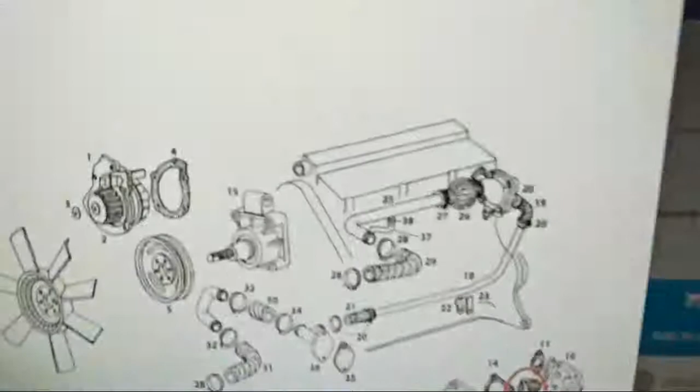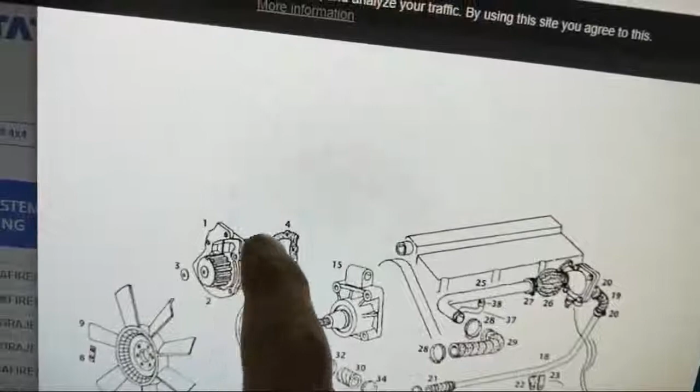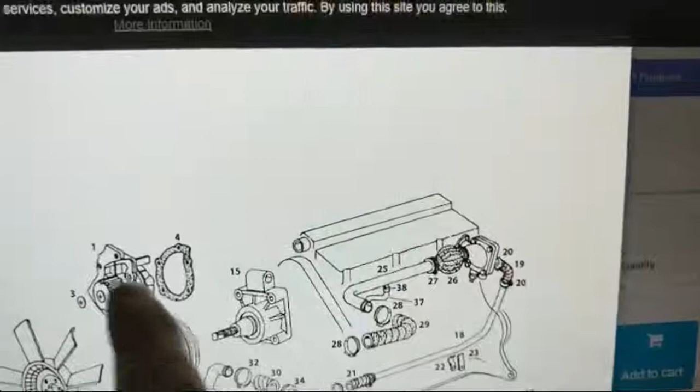Okay, let's have a look at this drawing here. It shows your water pump, the drive gear, the fan. I think that's actually the water pump because it's got the gear on the other side with all the teeth, and I don't even know what it's called. The pump itself is on this side, driven by, I believe, the timing belt. It drives the cam on the head, it drives the crank, but it's driven by the crank, and it drives the water pump and the cam and the pump.

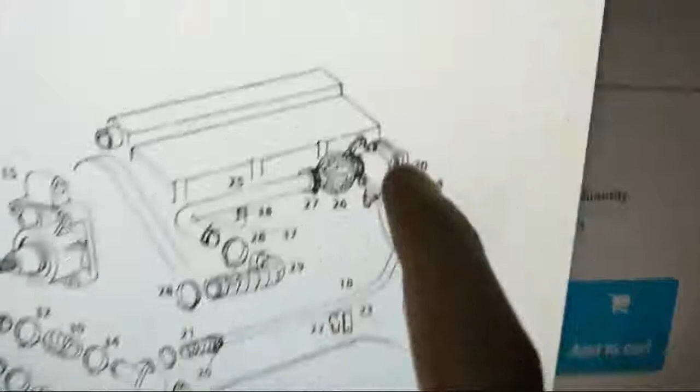Injection pump. So if we look at this drawing, it's got the 4-bolt pattern. And actually, while I'm here, I might as well see if I can grab the original drawings.

I was also talking to Mum about expenses, and both cars have a lot of expenses, but to get the Tata running, that's the maximum it's going to cost. Whereas with the Triton, there's about 8 grand worth in repairs.

There's about 4 grand in the suspension to be done, 2.5 in the engine, not including the head, which is 1,200. The CV joint needs to probably be replaced or investigated - that might knock down the cost. The drive shaft to the front, to have it fixed, is going to probably be about $60.

The tacho to be repaired is 220 - both cars have that same problem. The front windscreen has chips in it, so it needs to be replaced, and the wiper blades will be replaced when the window gets replaced.

The Tata just needs the major service, which is essentially the head gasket, water pump if I can get something, timing belts, head reconditioning, which it could come to that price, but it could be less - I believe I overestimated that. The thermostat I said $80 because we don't know what it's going to cost, but it's actually more like $40, so it's about the same as before. The oil change is about 120 because of parts, and then the tacho is 220, so that comes to about 2 grand.

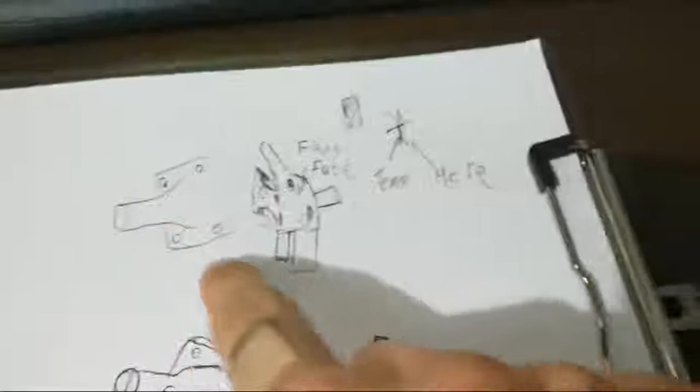If I put this one to the side, hopefully not losing it because I need those numbers - we've got the drawing that I put together. I said in the last video that I'm going to try and draw this off camera, and this is what I came up with off camera. This is my solution to trying to replace these two components.

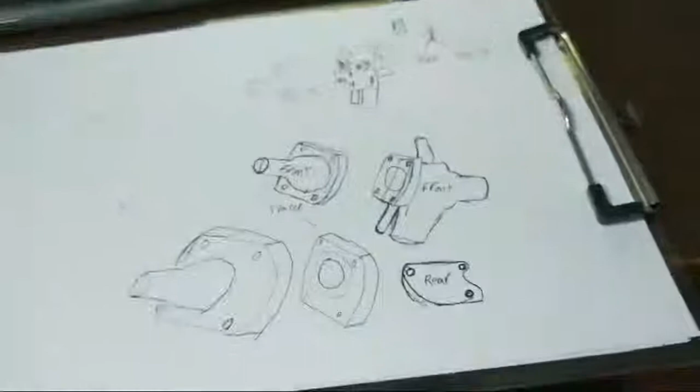Instead of replacing both, we leave this one intact. We put in a spacer plate that will accept any thermostat we design, and then have this clamp the thermostat in that location. That seemed like the best solution I could come up with.

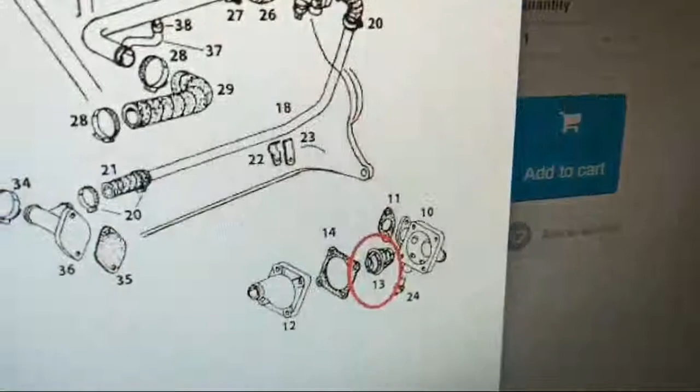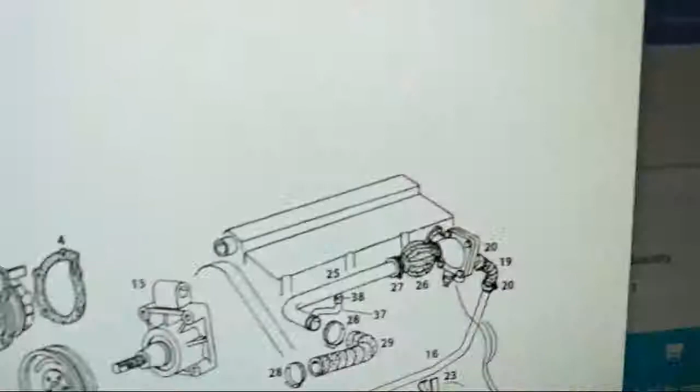Now, if we compare this drawing to that one, we can see there's a hose missing, there's a pipe missing. The two bottom ones appear up here, like it's that little fitting next to the other fitting - that's these two bottom ones here. The top one is not in this picture, so that's curious. The rear one is way bigger.

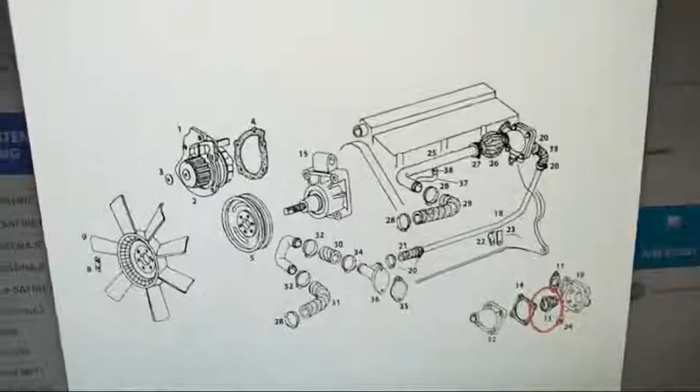But essentially, this is the part, this is the thing we're looking for. We've got the information now - it is that thermostat, and we now know that we've got the right thermostat as well, which is this one.

And it's an 83-degree one. I'm pretty sure it's in the picture as well. That's what they've given us. So that's what's meant to be in there. This item is already in the cart.

They've got a really bad site. If it doesn't show up the price, that tells you there's something wrong, because I've been looking at all the prices and trying to judge things. If we go looking here, it doesn't say unit price, it doesn't even give you a price. Okay, so this site is a bit broken.

So if I say add to the cart, it does actually tell you a price here. It says $33.60, and I wrote down a number that was in the total. So if I go here, I believe it is. What did it say? It said $33.60. So if I write in here

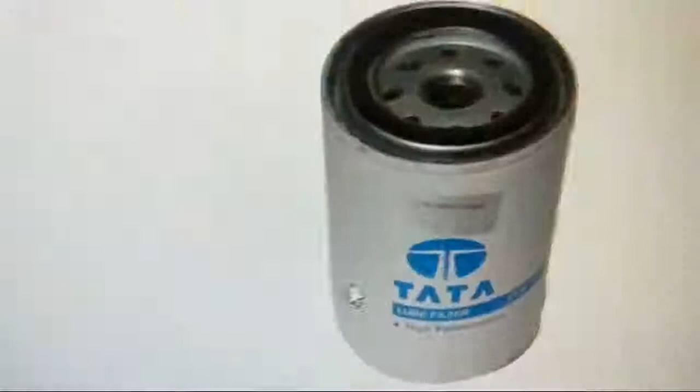So yeah, essentially all the parts seem to be here. Everything in their site, engine parts, where's the filters? Filters, they literally have a picture of a Tata filter. These things are all labeled as Tata. Look at this filter right here. It is literally Tata, a genuine Tata filter. It's no aftermarket stuff, it's literally an actual filter for their actual machines.

I wonder if this is in English. I don't know. No, it's not in English. Okay.

Yeah, that is pretty interesting. It doesn't say I can add it or nothing. This combination does not exist for the product, please enter and select another combination. I have no idea what they mean.

This is all weird, so because this doesn't actually show up any prices, that's not very helpful. But what we're going to do is refresh this page. Hopefully this will show add to cart, because it doesn't say it can be in any combination. It's $15.62, which will be essentially half the price of the other thing. It's about $30, actually it's going to be more like $40 for it because of that. So I'm going to leave it at that.

Essentially, this is the Tata Telcoline 1.9 liter diesel engine. I wonder what else we can find, what else do we have hard time with. We know they have that, exhaust seal systems, gaskets and seals, I believe.

If we look in here, we might actually find genuine parts that match up to the Tata. We gotta look, so gaskets and sealings. I don't think this is actually what we're looking for. Let's see, motor parts, motor seal. Motor seal sounds like it might be the right stuff.

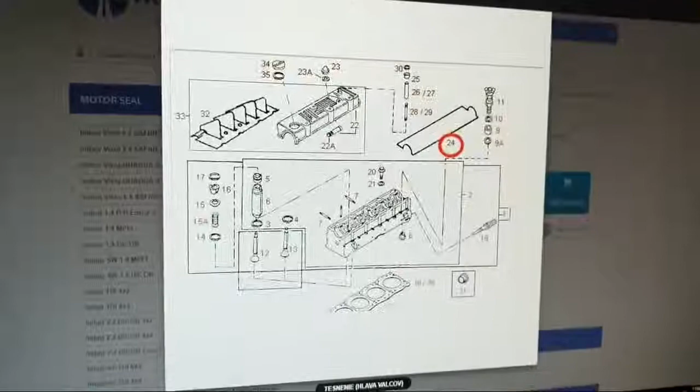There we go, gasket, turbine, inlet, the cylinder head cover. And what's this one? Cylinder head cover. Okay, if we look at this picture, it's probably the exact same head. So this is normally slanted a little bit.

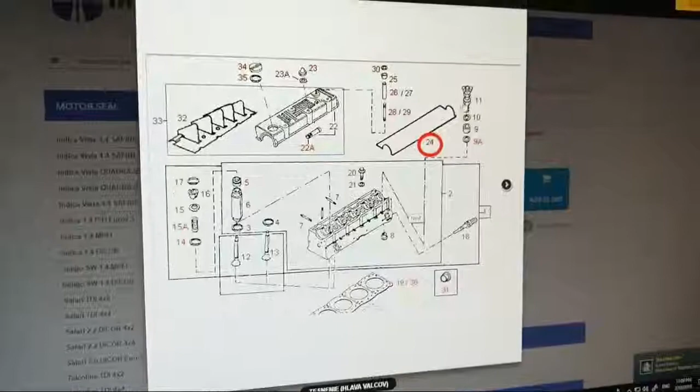It's hard to judge, but this does look like those bolts, to which we have whatever to do, and that's the gasket for that rocker cover.

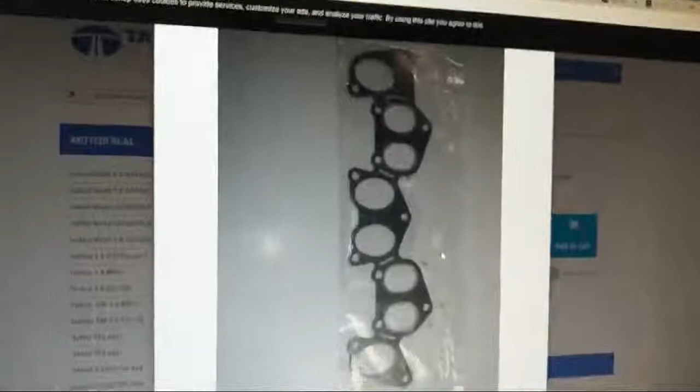Okay, can we find any other parts such as the head gasket? Oh, intake manifold, so is that steel? That's a composite gasket. So there is literally rings for your exhaust and just hollows for your intake. They also have these tiny little ports in it, which is interesting, I'm gonna guess that's for air circulation.

But yeah, gotta leave it alone for now. Turbine.

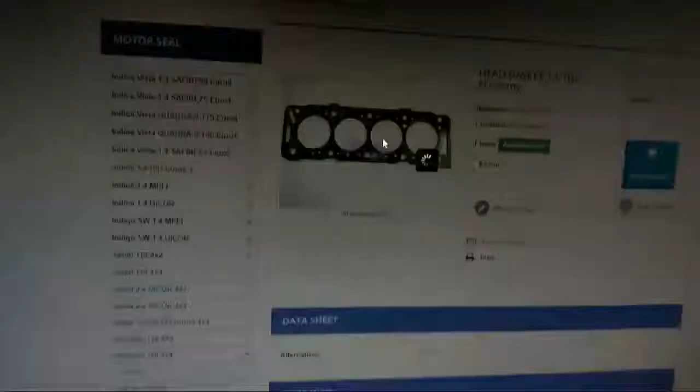Here's our head gasket, and now we can have a good look at this picture. It looks like it doesn't have fire rings, but it does look like it has fire rings. It's really interesting looking at this head gasket, and it looks so difficult to understand. Yeah, this is how head gaskets are starting to look - they literally put these little beads in them. That's a new thing I found out, not with the head gasket themselves, but...

Anyway, we're gonna go to the Super Cheap website and see. Not that one, we want... oh my god, can it please just go to the Super Cheap? Okay, it was the BX. I'm pretty sure it was BX 920 head gasket was the one we found. Payen. Here we go, BX 920.

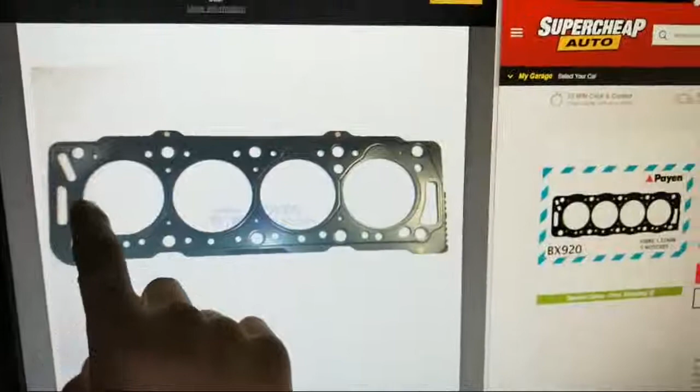So if I was to put this to the side for a moment, put this to this side, come on, do the draggy thing properly, and then drag this one to the side, drag this one over. Do they look the same? Okay, this looks different to this slightly. That one lines up to that. There is that little pinhole. It's a little bit different.

They've got the little holes in between the cylinders. Has the same water jacket. Has those two holes up the top, but different sizes, which is interesting. Has those holes down the bottom. Has those three in between those cylinders. Three in between those cylinders. Three there, top two, top two. It literally looks like an identical cylinder.

So these two gaskets are exactly the same, but this Payen one is $246. The real question right now, unfortunately, is closing that.

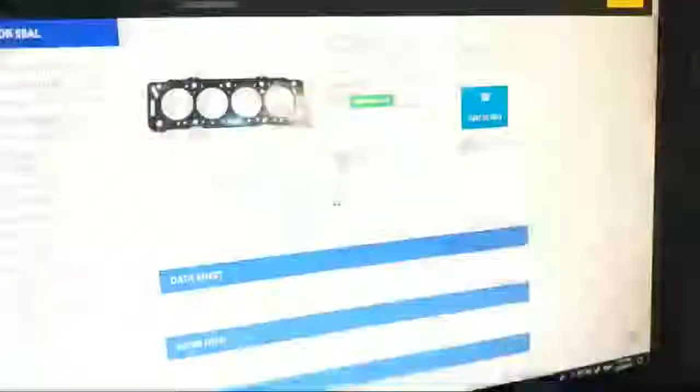And then even their clutches are cheaper to order, but then you have to ship them, so it could come to the same price. You never know, it could be this price. It's expensive though.

And it's always tiring at this time of the night. So it only has that one little difference between the two. I don't know how critical that little spot is between the two gaskets. All I know is now we know for certain that that head gasket was the right head gasket.

What about this cylinder head? What if we want a cylinder head? What is this thing worth? There's 3 bolts. Now we can get a better look at this. So there's the rear - the rear one is the one we're looking at right now. So that rear is that rear plate there with the hole. That was where we were looking on the head.

They look exactly identical. I have no doubt this is the exact cylinder head that we'd need if we were to recon the head or replace it. That is 600 euros - I bet you that is expensive. I'm gonna go to the euro calculator and just put in 600, because that's like $1,200, or that's about $1,000.

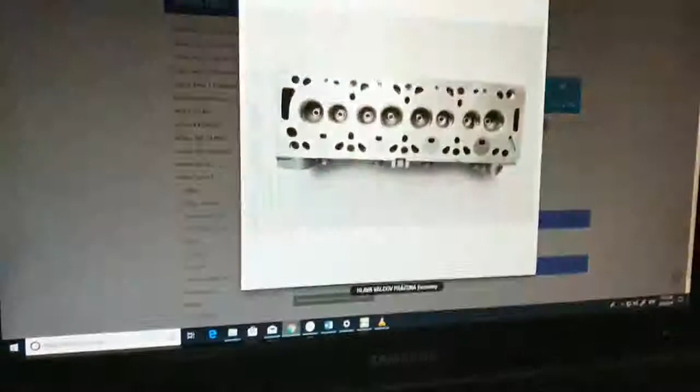Oh God, I'm just so getting tired all the time. At least we can now look at this and see what these... because it's all going to come down to those precombustion chambers. I'm pretty sure I can get them replaced if I need to. Then there's the seats for the valves. I don't know how good they're going to be. We're going to have to pull the head off.

That is a really weird pattern - that's exhaust, intake, intake, exhaust, exhaust, intake, intake, exhaust. That is the weirdest pattern I've ever seen. I normally see intake, exhaust, intake, exhaust - it's normally that, not this exhaust, intake, intake, exhaust. That is just strange, okay, I've never seen that before.

Is this still the same vehicle? No, it's a Tata Safari. We don't want the Tata Safari, we want the 4x4 Telcoline. And then we go here, and we can look straight for whatever we want. So that head gasket looks like it's the right one.